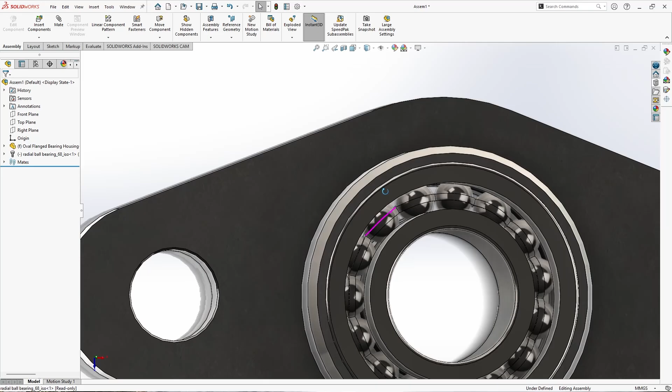In this video, we'll walk you through how to design and assemble an oval flanged bearing housing in SolidWorks. We'll cover every step for creating sketches, applying features, adding materials, and finally building the complete assembly using a standard bearing from Toolbox. Let's get started.

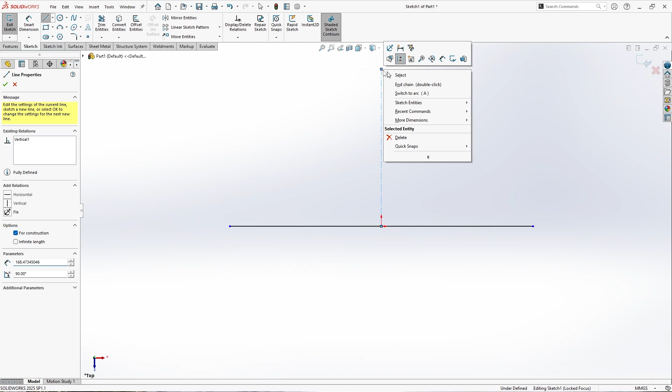Start a new part and open a sketch on the top plane. Next, draw a horizontal midpoint line centered at the origin. This will serve as a symmetry guide throughout the sketch. After that, add a vertical center line starting from the origin. We'll use this for mirroring and the revolve feature later. Now convert the horizontal line into construction geometry, so it doesn't interfere with the solid feature.

Now use the circle tool to draw the base shape with a few circles. These circles will make the main body and the center hole. Use the center lines to help you place them neatly. Once the circles are in place, add smart dimensions to define their diameter and spacing between them.

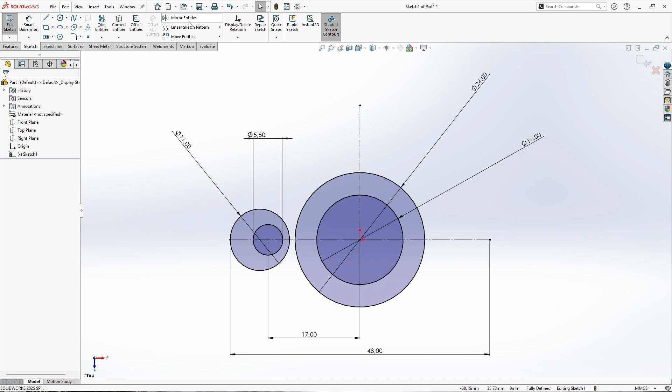Now mirror the left circle across the vertical center line using the Mirror Entities tool to create a symmetrical layout. Next, connect the outer edge of the circles with four tangent lines to complete the outer profile of the housing.

After that, clean up the sketch using the Trim Entities tool to remove any overlapping or extra lines.

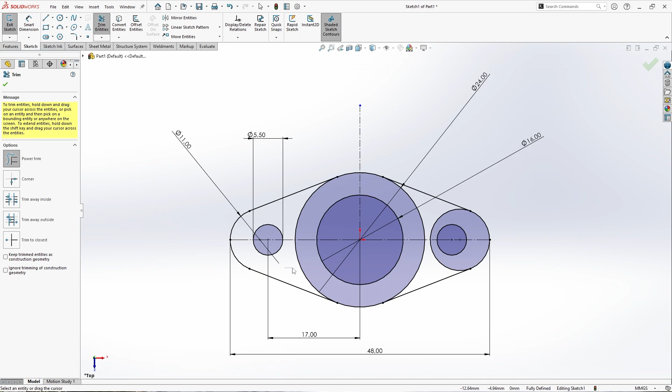Once the profile is closed, use Boss Extrude to give it thickness. Set the extrusion to 2 mm to form the base plate of the housing.

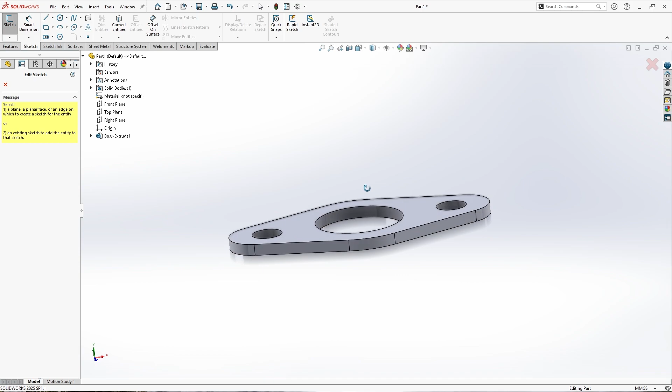Now let's create the inner sleeve. Start a new sketch on the front plane. Then draw a vertical center line from the origin. This will act as our axis of revolution. Next, add a horizontal center line from the same origin point to help with rectangle positioning.

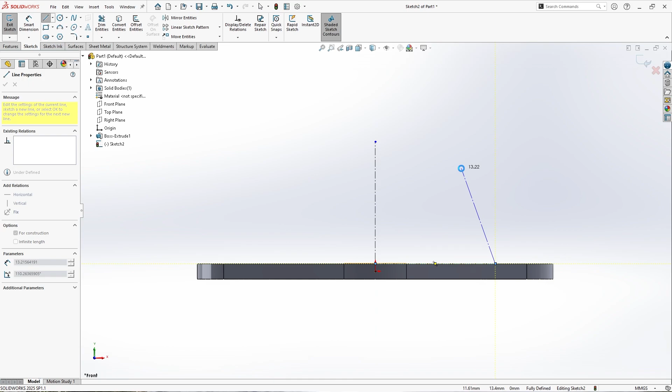Now apply smart dimension to both center lines to define their length and position. Once that's done, draw a rectangle extending from the vertical center line. This rectangle represents the cross-section of the sleeve. Then dimension the rectangle to specify the sleeve wall thickness and height.

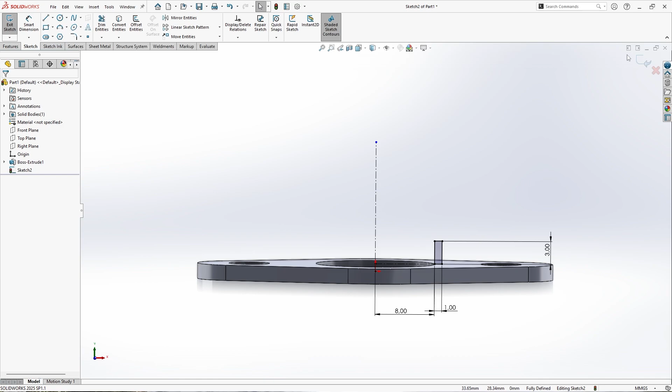After that, revolve the sketch using the revolve feature to create a full cylindrical sleeve.

Next, let's make the second sleeve on the opposing side. Create another sketch on the front plane. Draw a vertical center line, once again, from the origin. Then add the horizontal center lines as before. Now dimension both center lines to keep everything consistent with the first sleeve.

After that, draw a second rectangle from the center line for the sleeve profile. Add all required dimensions to define the rectangle clearly. Then use the revolve feature to generate the second cylindrical feature.

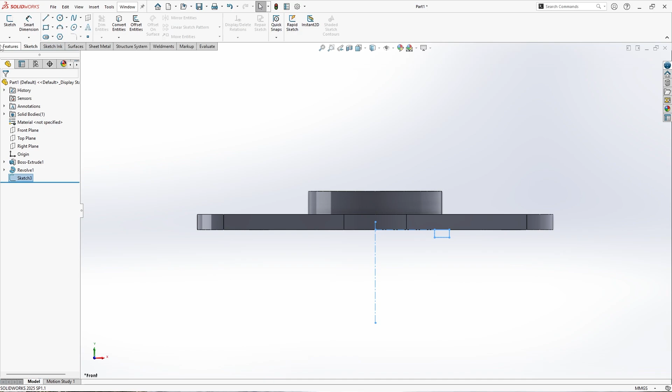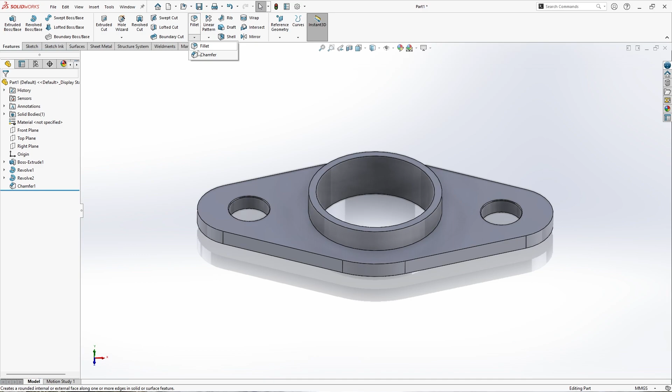Now let's add a chamfer. Start with the left side hole using the chamfer tool. Next, add a chamfer on the top central hole to ensure all edges are smooth. Do the same for the bottom central hole using the same chamfer settings.

Once the geometry is complete, apply a material like AISI 1020 from the feature manager to finalize the look and properties. Now save the part and name it oval flange bearing housing.

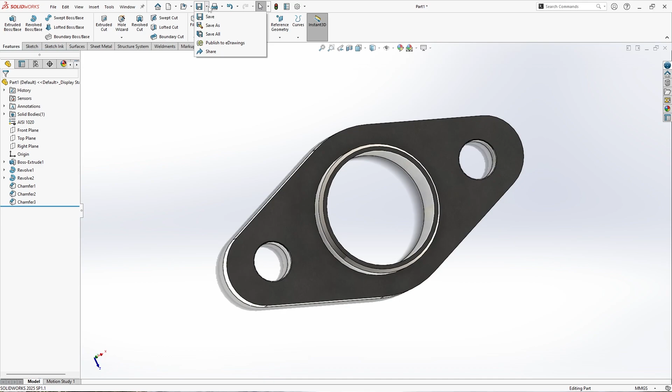Let's move on to assembly. Create a new assembly from the file menu. Then insert the oval flange housing as your first component.

Now from the toolbox, insert a radial ball bearing. Choose the ISO 15 RBB standard with a bearing size of 388.

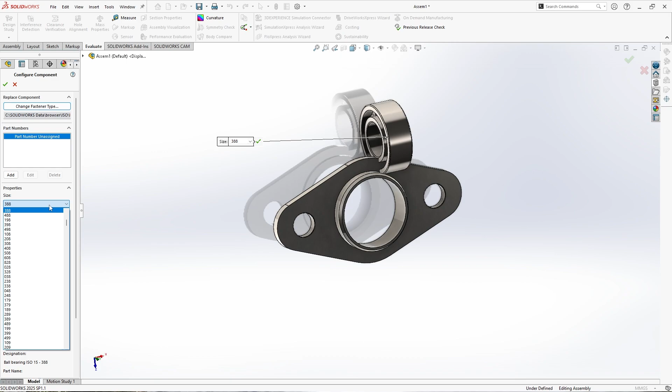Apply a concentric mate between the outer cylinder of the bearing and the hole in the housing. Then use a coincident mate to align the flat face of the bearing to the housing surface.

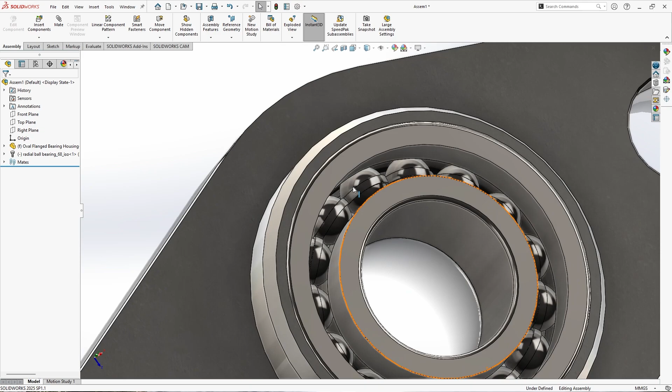Finally, save your assembly and name it Oval Flange Bearing Assembly. And that completes the full design and assembly of the oval flange bearing housing in SolidWorks. Thanks for watching and see you guys in the next video.